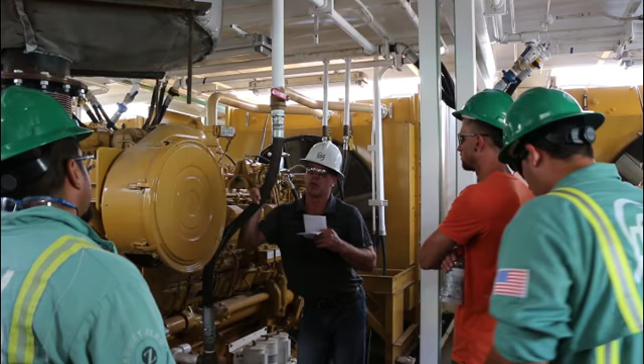So don't ever work on an engine fuel system with the engine running, because you really have no control on that. And that's what happened to the motorhand in that situation. You didn't cut off the engine? Well, I can't speak for him, but there were two engines running and one was shut off, and he decided to work on the fuel system with one still running instead of shutting it off and starting another one. But anyway, fuel systems, yes, they happen to burn right down very quickly.

These breakovers set up and change on the fly? Yeah, that's exactly what these are. You always have to have one on, right? But you can change those on the fly. I really don't recommend it. Yeah, in case something does happen.

I guess it's pretty normal. That's called slobbering, is what that is. And it's from running an engine at idle too long, at idle or little to no load. And there's no way to get around it other than putting a load onto the engine, 20, 30, 40% load. It'll happen when it's brand new, and it'll happen when it's got 50,000 hours. We expect our engines to last about 60,000 hours.

These engines will die once the voltage drops below 20. That's why they have their own separate ones. So if you have one set of batteries running three, you lose your batteries, now you're on downtime. They're all equipped with their own battery charger in that box. That's one of the things a motorhand should really check, the quality of his batteries, the connections. Make sure that there's no corrosion, and these are all maintenance-free batteries, so you don't have to add water or anything like that.

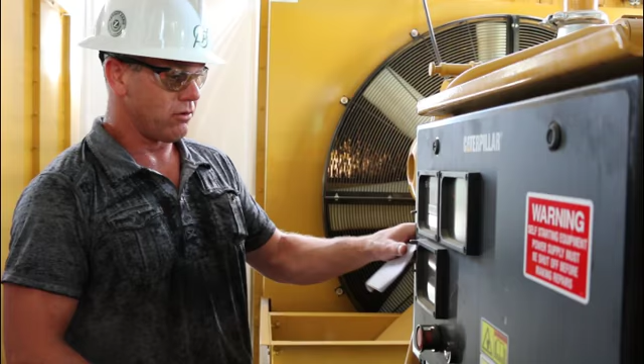We get many calls. My engine won't start, it won't do this, it'll shut down. It's got 95 hours on it, and obviously there's no... So I call it like pages of a book. So you can...

First page, and that'll tell you your load. Obviously, if it was running. Yeah, you can go through it and see it would be something other than, but you can't screw anything up, you can't mess anything up.

But that's how you get through your fault codes. Obviously, if you have a flashing light, there's something wrong, right? They don't flash just to make them look pretty. But you can play with it. There's 5 pages. So you can go through the load, you can go through each individual gauge. It'll tell you in metric, standard. You get your codes off of here.

So when you guys are out there, you can play with them, right? And just learn how to go through the codes, how to get the codes, and learn where your gauges and your pressure should be. Right, when this rig leaves the yard and goes to the field, I would assume that everything is in 100% working condition. So you know that the fuel pressure should be 68 pounds, you know the oil pressure should be 68 pounds, your voltage should be 25, whatever. So take the time to know what each individual gauge does, and know where it should be sitting, right?

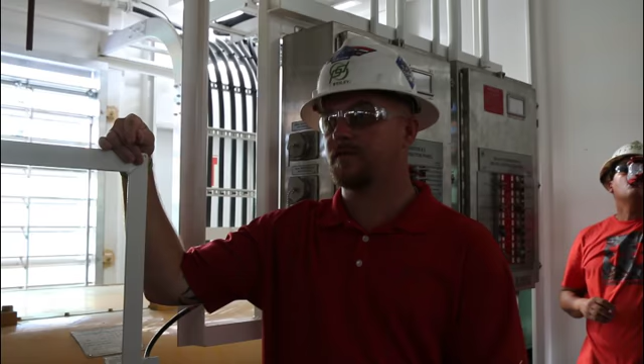Wes? You can check your turbo temperatures, your right side, your left side. That panel's basically a dummy panel. You can't hurt it. You can change it from US to metric, and then you may be like, oh, my temperature is way high. You just got to understand your Celsius, Fahrenheit. Understanding this engine, knowing the key points to it, we can show you guys a little bit more throughout the shop.

Then over here, you got your rig savers, you got all your fuel system, knowing where all your shutoff valves are, just in case you got a fuel leak, something like that. Understanding your equipment, like it says, if you understand it, you'll maintain it, you'll follow it. Checking your levels, your grease points, stuff like that, that's gonna keep the engine life long term for this rig. These engines go down, this rig doesn't run.

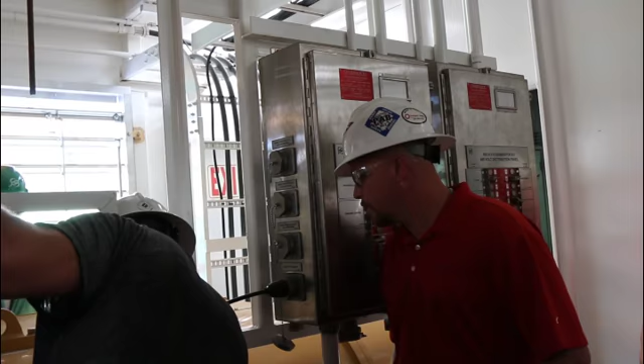One of the things I'll bring up right now, these generators are equipped with, they're called double bearing generators. There's one bearing in the front, one bearing in the rear. And it says right on this tag how much grease and when to grease them. I advise you to pay attention to that. That's another huge problem we have, bearing failures on these generators, and we bring them back and you ask the push, have you been doing your maintenance stuff? Yeah. But when we get the generator back and tear it down, we can see that nobody's greased this generator in months or years or whatever, right?

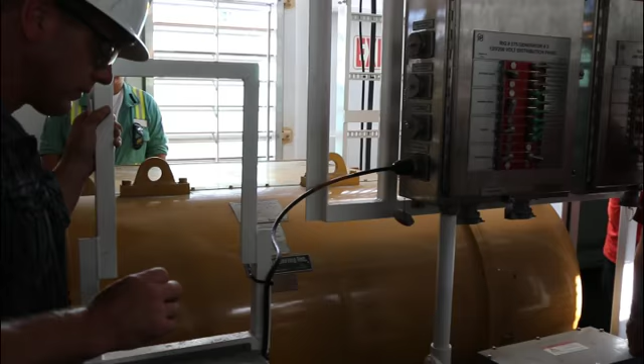So there's a grease line right up here, and there's a grease zerk right there in the back. I think it's 6 ounces every 12 months. I believe a tube of grease is 14 ounces. So those bearings take, give or take, a half a tube of grease every 12 months. You don't have to do it all at once, you can do it quarterly or whatever, right? Can't hurt them. These things have got grease strips.

The grease drops on the bottom. So I mean, you can put a couple hundred tubes in, but you'll just have a couple hundred tubes on the ground, right? But at least we put grease in it. Yeah, that's costly.

Depending on how bad the bearing is, if the rotor, everybody know what a rotor and stator is? Rotor is obviously a rotating part, stator is a stationary part. If they touch, it'll be about a $40,000 repair. This whole engine package is $400,000. So it's not a little 350 Chevy, right? You build a really good 350 for what, a couple $1,000? So without them, it's the heart of the whole rig. Without it, you got nothing. Every piece of the rig is important, but obviously, because I take care of engines, it's the most important.

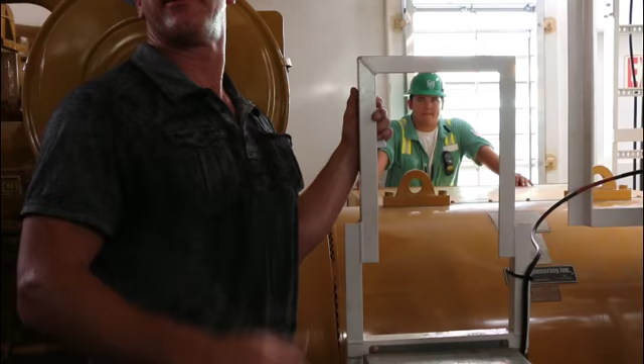If you run an air winch in Canada, it freezes up. So we don't run a lot of air on our rigs. We don't have huge air compressors like some of you guys might be familiar with, two big 60 horsepower air compressors. Ours aren't. Everything is hydraulics due to the fact that hydraulic doesn't freeze. So it's kind of a Canadian mentality more than anything.

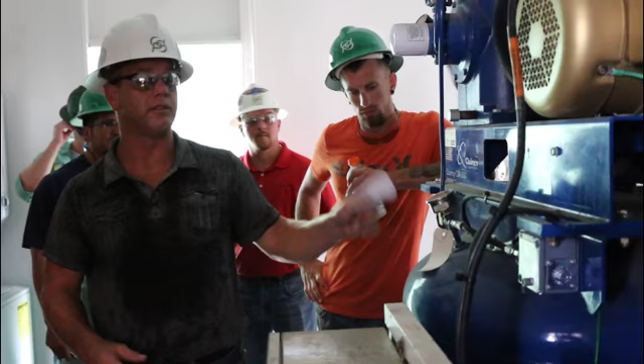So we'll go through there. But it's set here, just like everything set at factory. We set it. This is about 118 pounds right now, and they'll be set identical. They do require oil changes. That's why they have oil filters. They don't take a lot of oil, so it's not costly. And obviously redundancy. We got two of them, so you can leave one running and change the oil in the other one.

Obviously, you guys have motor hands. You should have some kind of a maintenance book. Your push should. That's part of it. What are these compressors going to be feeding on the rig? Well, they don't feed a hell of a lot other than a few clutches and that. And then obviously air for start up, but we don't have really any winches and that. So that's why they're not very large.

Anyway. What else you guys want to talk about? What's this space here? This is a work area.

250 to 500 hours, they give you that leeway to change the oil. The big ones are 1,000. Caterpillar recommends every 500 hours, but we did a pilot a little while ago, so we kept sampling our oil to figure out where a safe hour range would be. And at 1,000 hours, the oil still has its properties and capabilities. There's some drilling companies offshore that don't change oil. They just change filters and replenish.

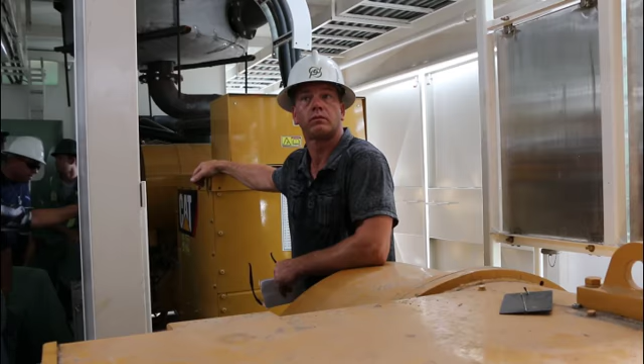Obviously, if there's nothing in the sight glass, put something in there. They stay pretty close to the bottom. The level on them is toward the bottom because there's an expansion there. So if you guys fill them up every day, all the way to the top, you're gonna burp them out. And then you're gonna think that you're burning 5 gallons a day. It's actually your expansion for when your coolant gets hotter.

Quiet, perfect. Each company has their own idea of what radiator is good and what radiator is bad. This is a Fuzzy's radiator. They've been around for years and years. They build a good product. We stick with Global Heat Transfer, because of the cold. It's a copper core and it's a tube. The ones we use are tube type. They seem to hold up better. And you stick with one thing and you standardize. Because if you have so many, now you gotta have spare parts for this, spare parts for that.

So, engine packages, we work on them all. 3512, 398. If it burns diesel, we work on it. Even if it don't. If you see something wrong, bolts loose, something like that, let somebody know. Can we shut it down? Do we need a mechanic? Do we need an electrician? Whoever it is. Because if you just cover your eye and keep on walking, eventually it's going to come apart. It's going to wreck something. It's going to put a fan through the radiator, stuff like that.

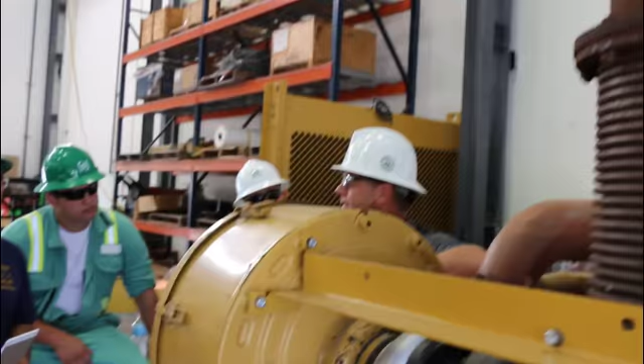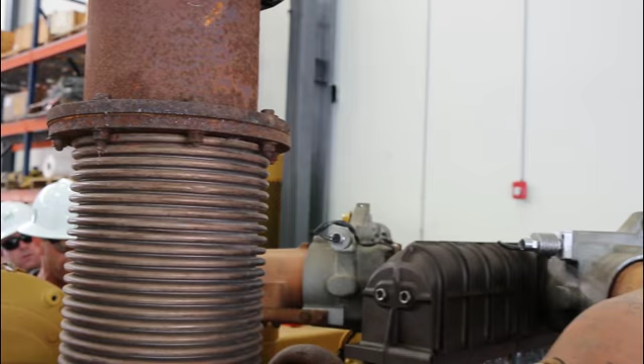The engineers could have done it slightly different. It's called a micro switch, and it's got a little ball in there, and it runs a circuit from here to that one, back over to the other side to the same micro switch. And what happens is from the vibration, and there is a bit of soot that goes through here, the carbon gums these up, and then it'll just shut your rig down.

Because actually, this circuit gets cut, right? It's not a circuit anymore. What it does is it grounds the ECM, so it just kills all power to the injectors. So no matter what you do, it won't crank, it won't do anything.

There are many of them out there, and that's one of the reasons a lot of the contractors use them. There's Cat dealers, they're everywhere, right? They're in San Antonio, they're in Odessa. Every engine's a good engine, but they're gonna break down. So the difference is being able to get parts, right? Get mechanics. And that's one of the reasons why we use Caterpillar. I can phone Joe's engine shop and tell him I got a 3512. He knows, or he's got a mechanic that can work on it.

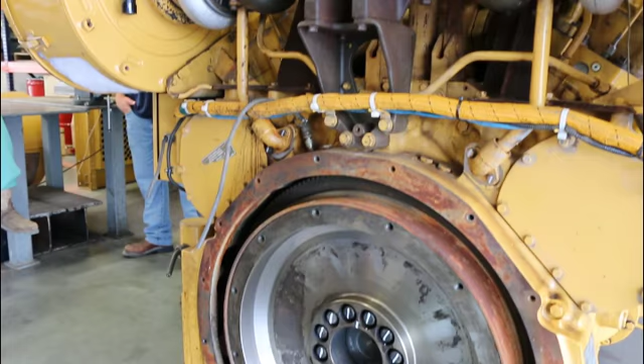Anybody? Nothing? Frank?

These sock filters are cheap. It's easy to pop that cover off and pull that thing out and just change that sock filter, not the whole filter. Monthly, semi? When you see them dirty, due to the fact that in West Texas, some days are dirtier. If you go up north, you may not have near the dust that we do in West Texas. But yeah, those are $2.88, I think. They're very cheap compared to that filter, and you can take it out, throw it in the trash, slide another one on there, put the air cleaner back in, and you're back to business.

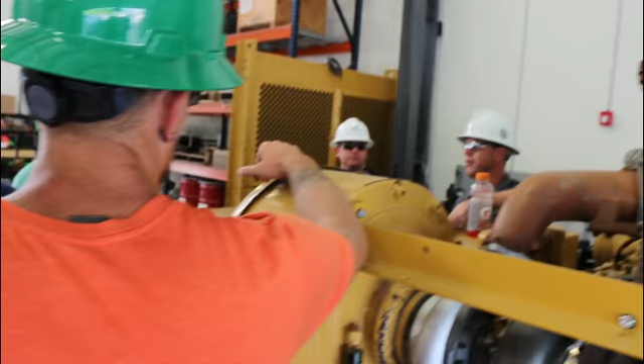So, coming from the farm, years ago I watched my dad take the filter off the tractor, bang the dust out, blow the dust off, and put it back in the tractor. That is not a practice at Precision Drilling. We don't mechanically clean filters. You can actually take your filters in and get them cleaned.

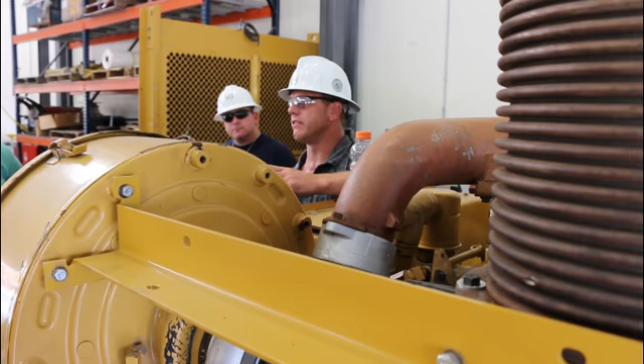So now, obviously, they're engineered, right? Everything is engineered. As the filter gets dirtier, it becomes more efficient, really. Less and less air goes through it, it cleans better, but you gotta feed this thing air. This thing takes a shit pile of air. So if you see it dirty, just swap it out. Make sure your rig manager knows when you only have 2 filters left.

Realistically, you should have a complete set of filters on your rig at all times, right? And the people that bring the oil can bring you filters. We have PD Supply, which supplies rope, soap, and dope. I call it rope, soap, and dope to our rigs, and the rig manager should have any or all your maintenance products on hand.

The functions of some of the safety equipment, like the catwalk: they don't have laser sensors on there like before. This has a safety curtain around there, so with people walking into there, you actually have to manually bump it, engage that, or it will isolate that equipment, lock it out. Up on the rig floor, we'll go through fire extinguisher replacements, eye wash areas, lockout boards. I'll let Jason Atkins go through the Amphion system. He's electrical foreman for the shop and field manager. I'm sorry, he's a manager.

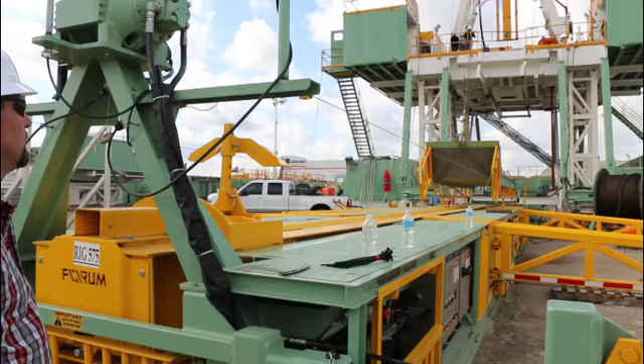If for some reason somebody were to step up here, they have to manually bump that cable. If you're going to be going up here to adjust any equipment, that's either being told to go down there or you're going down there on your own. If you're going to be going up there, of course you would alert the operator, hey, I'm going to be on the catwalk. But also there's this other device, it's an e-stop for that equipment. You go up there, give it a pull, it should automatically shut off this equipment and it will not function until you reset it manually down here.

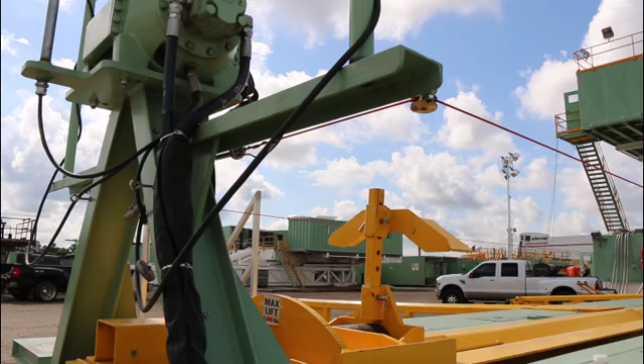So this cable works just like a garage door opener. If I tug on this cable, it's going to pull out that e-stop and it's going to disengage it. The only way to manually engage it again is to come back in here and reset that. That's one safety feature on the catwalk. The older rigs had eyes on it, kind of like, right, just like the garage. And what's happening? The location wasn't level. They were off, out of sight, and giving them a lot of alarms. So they kind of went with this safety feature.

There's going to be a camera installed on the center of this as well that hasn't been installed yet. So you have the ability to see casing getting run, the hands up on the racking board. You can see what's going on as a driller inside that console, because once you're inside there behind that drilling console, your limit of visibility without those cameras is narrowed to just what you have on that screen. Once you get pipe in that derrick, you're not going to be able to see half that floor. You have to utilize the cameras that have been installed that you can zoom in, pan out, and actually see what's going on operation-wise.

That communication, that's the key that we talk about all the time. Communication is key. You have to be able to talk with your hands, talk with operations, what's going on, and have good communication with your hands. If something's going on, you've got to be able to have that stop work authority. You know, the driller can't see everything that's going on. He can't see where your foot's getting put. He's not going to know when it happens. You've got to alert them. You've got to make sure you're talking about it. Having good guys on the floor who know how to run that floor and operate all that equipment. Whoever's going to be on that floor, they're running that floor. That driller's just making sure that they're doing what they're told and working safe.

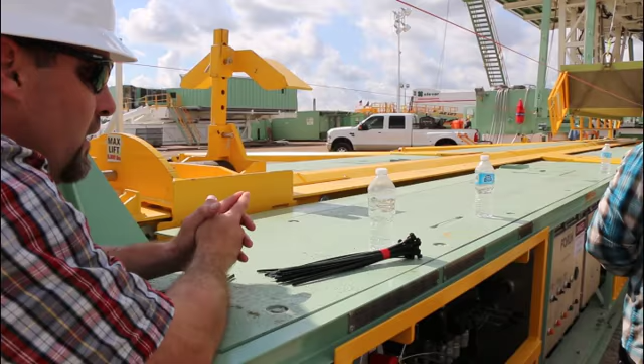So the communications between that and this usually cause a lot of problems, electrical problems mainly. This thing is pretty much, if it breaks, you're going to need an electrician or you're going to need a hydraulic tech. There's not going to be a lot you can do. If something gets bent, you can try to straighten it out, but it's mostly electrical and hydraulic problems.

I know the biggest issues we had on these lots at the time was the hydraulics getting hot running it. Yeah, tanks might be a little too small. In the middle of the day when you're running it, the hottest part of the day, you're running pipe up and down and the hydraulics are getting hot.

I need to look into the hydraulics on this one here. I'm not sure on these automatic fans on these. I know the older ones you had a manual fan on them, and you also had manual heaters on it. We also had a time for a while there where guys were leaving the heater on during the winter and forgot to turn it off. So it was keeping the hydraulic fluid warm, and with the hot temperatures running the catwalk up and down, it's overheating, and this whole thing goes to crap suddenly.

It's made in such a way that we can manually roll the pipe on, lock it up, and still go back to picking up pipe the old school way with lift caps. Well, it depends on what your problem is. If you're having a hydraulics issue, none of this is going to work, your slide's not going to work.

So you can run this from the floor and down here manually. And I know we have problems with a lot of the first generation rigs where there wasn't communication, they had to have a guy down here.

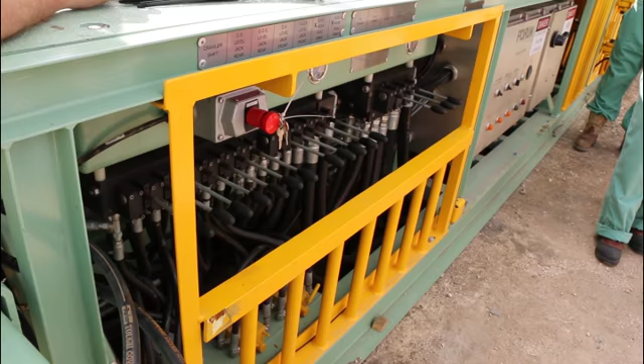Where's the control for the floor doghouse? The control's right there in the corner, inside where your track is. You slide that pipe in there and it holds it in there, so that way it doesn't back on.

But we're not supposed to work anything overhead here. So if it does get stuck up there, we'll get somebody out here to bring it down. Usually, if something got stuck up in there, we'd have you put the pin in there just to keep it from falling, but then we'd send one of our guys out to lower it down for you.

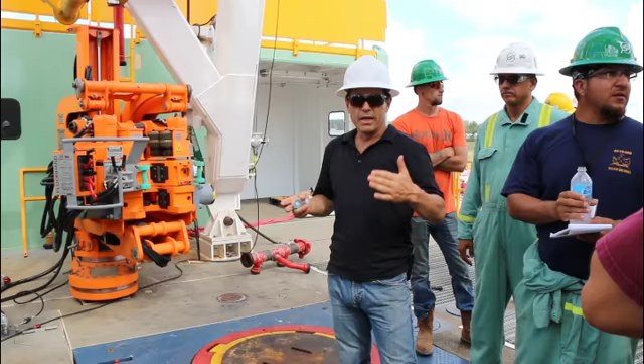Right over the A-leg spread, so you got more floor space. You drop the rotary table down so it's flush with the floor now. That's almost it. We took the 3 good features that NOV had and we incorporated. Setback has been increased, more racking capacity, 25,000 feet now. Hook load of 850, I think it is, right? 850.

What are some of our main safety features on the rig floor now? Would you say? Also, we do have a mouse hole slip bowl so that you can do stands offline as long as you're taking the precautionary notes. Safety feature, dropping of the rotary table was a safety feature. We've rotated the drawworks so that the drum is visible from the driller's console.

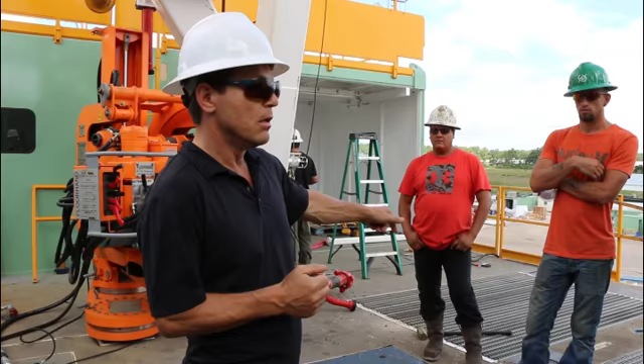The iron roughneck's been repositioned slightly, I'd say it's as safe as it was before. There's nothing really changed there. Yeah, the wrench will reach both mouse holes. These rigs are originally designed with 2 mouse holes. Because we run range 3 pipe, which are 45 feet long, you can put 2 joints in, screw into the first one, pull it out, screw into the second one, and then build a stand on the fly as opposed to building it offline and then grabbing it.

Another standard across all of our rigs now is anti-skid on all of our rig floor walking areas. Like you said, they dropped the rotary table to be level with the floor, so it's not a trip hazard. We're still going to be installing rotary mats with skid material on them with the danger zone painted on there. Just like when you walked into this area, on each A-leg there's a stop sign saying beware of the danger zone, just like in front of the drawworks.

Those signs are there as a warning, as an acknowledgement saying stop. Look at what you're about to walk into, look up, look above. There's operations going on, your third party coming up here, that stop sign hopefully will stop you and alert you that there's operations going on here. If I'm not aware, I should look around and ask these questions. Just like on the driller's console in there, it says authorized personnel only. If I'm not authorized, I'm not going to touch it.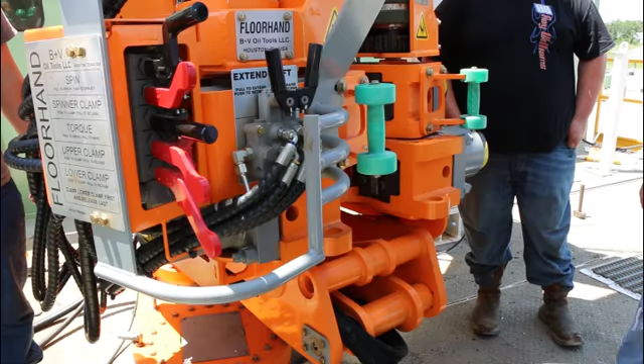Most of this equipment out here, if you're not trained to operate this equipment, ask, get trained on it. If you never run a Floorhand, an SC80, get to know that equipment, know the functions of it, know how to maintain it, and do inspections on it. The equipment's only as safe as the operator itself.

If you don't set your parameters right on this drawworks, you don't do your block calibration, you can still tear things up. It does have safety features in there for your lower and upper limits, but if for some reason you didn't run the proper strings on your block, you added new elevators in, new bails, you can still run into the floor. If you don't write the proper number of strings on your block, it's going to run a lot faster. It's not going to know its height correctly.

These are all different things that are incorporated with it. They've added into the system. But just like anything else, there's that human error. The system's only as good as the person operating it.

There's two other features we've added with the block system now as well. Monkey board collision. So there's set points that you choose in the derrick. There's actually two systems. One's mounted right on the main leg at about 67 feet. So if the elevators are extended out at that point and you pass through that, you're going to get an audible alarm in the doghouse just as a reminder.

It doesn't stop it, but we're also adding that feature right into the Amphion system, so it'll act just like you have your lower limit and your upper limit. If your elevators are extended out either above or below the board, it'll slow you down, or it'll actually stop you, and the only way you can carry on is hold the override button with your elevators extended, right? So, yeah, after a certain point.

So you can push it out, close to the end of the diving board to assist the derrick. That's right. No, it will. Right, because when you push the pipe out to assist the derrick hand, as soon as he has it, you hit float and away you come down, right? As soon as you're in float mode, it'll allow you to go up and down because the elevators are back on well center, right?

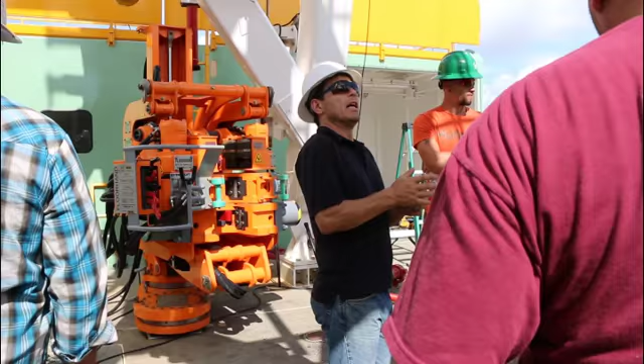Yeah, she's in there testing. It's already installed - not the second section up. You see a frame around it? Look up this derrick leg right here, you'll see a clamp on there.

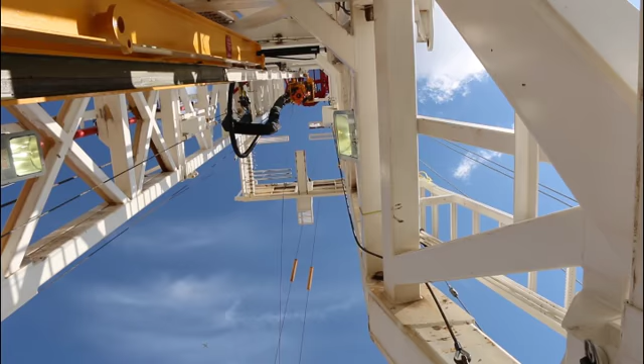They put an alarm and a buzzer and stuff in there. This is a new system we're going to try - this is the first rig it's going on. That's actually a second system, like the Amphion NOV system, that's a secondary. We're just testing them out to see. Because the thing about that is it's a fixed set point - it doesn't rely on where you position or do your limits. That one's a fixed system that's going to flag you so you know you're there.

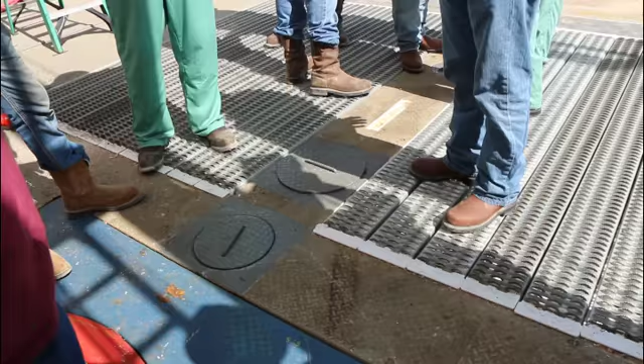There's a third mouse hole here, guys. What that's for is our test stump. We have what we call our stack rabbit BOP handling system - there's actually a test stump on it so you can test offline. You can stand the stack up back there, and that's a place where you can drop a joint of pipe through it and test offline, so you can pre-test all your BOPs.

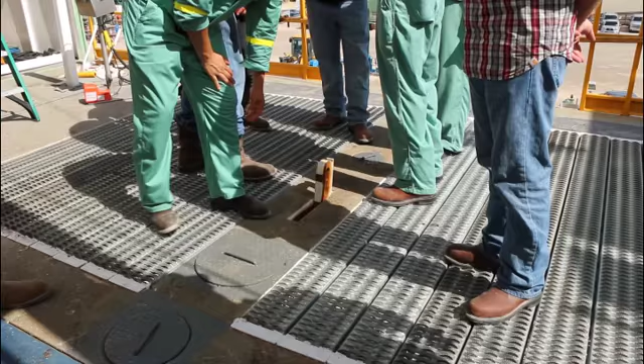The lug in the center flips up - you just want to pull that up on the front. What that is, we call it a logging lug. So when you're logging, you've got your sheave here. That's just a place to tie it off, right? It's a certified tie-off point for it. I mean, you can use it for a lot of other things too, but that was its main purpose. It lays down flat into the floor so it's not a tripping hazard.

Features that we've had on the floor, we're still installing - waiting on equipment, as you can see we still have a lot of construction going on. We're getting things buttoned up. We will have a shower eye wash station available on the rig floor in case there's an emergency where you need to rinse off or wash off your eyes for some reason. There'll be a shower and eye wash station in that area.

So everything that we install is easy to rig up and rig down. That way, equipment gets put up and maintained like it's supposed to. Each one of the buildings is going to have a fire extinguisher, depending on the kind of building, what kind of fire extinguisher is associated with it. The drive house, electrical house, is going to have CO2 fire extinguishers to fight that type of typical fire.

Inside this building for the dog house, it's going to have two different kinds of fire extinguishers - one ABC and one CO2. That way if there's a fire on the floor, you have an ABC available, but there'll also be at the entry points to the rig floor, fire extinguishers available.

Like I said, other safety features - anti-skid on the entire floor, walking surfaces, rooftops have anti-skid, handrails all the way around, and safety cables on the roof. So whenever you do start rigging down handrails, there is a safety tie-off area, so you can maintain 100% tie-off at all times.

Rig floor, they do have a rope grab system, and you do have SALA blocks coming in that you'll be installing underneath that monkey board. They're not installed yet, but we do have a rope grab system, so you can use it whenever you're working at height.

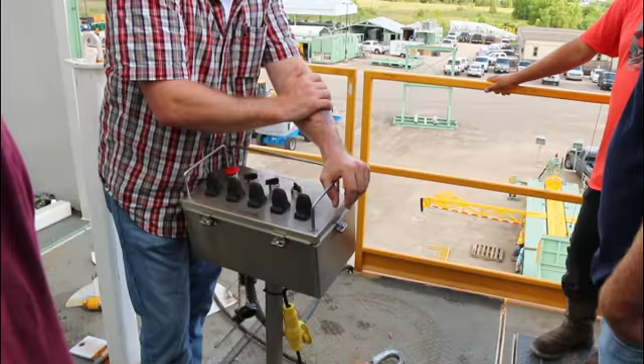Most of the time with the communication, if you knock this over and you mess something up, usually you blow fuses or trip breakers down there in your panel. And so once that happens, you're not going to be able to control it from down there either. You're going to have to get a hold of one of our guys out in the field. The best thing you can do is just be real careful with this. Most of the time I've seen them drag it over the handrails and tie it up with a rope so you can't knock it over. Or get it wet.

These seals, after about a year, this rubber gasket that's in here, I don't know what they're using, but that seal usually gets all messed up. So water will eventually get in the bottle. Just keep in mind that's what this is. So making sure that this is maintained and works correctly. You don't just pull on this, you have to actually twist it to release your E-stop.

You got to have your foot maintained on the pedal at all times, be able to function and work the equipment. I know it has enough cable here, but you don't want to have this in a blind spot where you can't actually see visually down to the catwalk. We don't have this on the other side. It can be removed and moved around the cable. I don't know what the length of it is, but I'm sure you can position it in an area where it's more comfortable for you.

Most of the time, you're going to have all the pipe on this side, and you're going to be able to feel it coming up. So it is movable. It's not fastened to the floor. You can move it around. It's not a wireless unit. I know some of the catwalks have wireless controls, but a lot of that's not getting maintained. They're dropped, they're left out in the rain. They get damaged. People lose the keys for them, and guess what? You have to work them manually down there.

This isn't going anywhere. This is a lot better. Very easy. Labeled exactly for the function it's doing. It's got a good safety feature. This is where all the magic happens right here. A lot of people don't realize this. Whoever's sitting in this chair has everybody's life out there on the rig floor in their hands. They can control anything and everything that happens, and so whoever's here needs to be paying attention at all times.

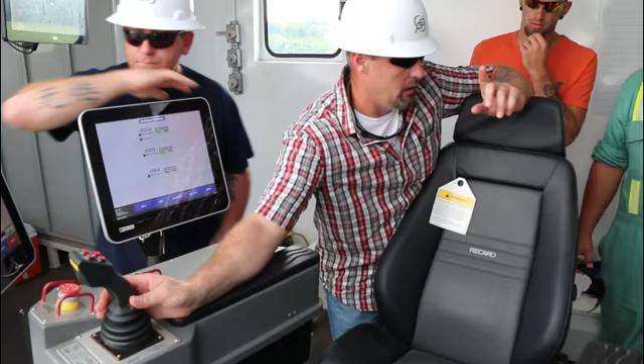Every time you got to do a rig move and you go to rig up, I don't know what Precision's policy is. I test this thing every day just to make sure it works. But you've got so many people out here depending on you, I would test this and make sure that it works no matter what.

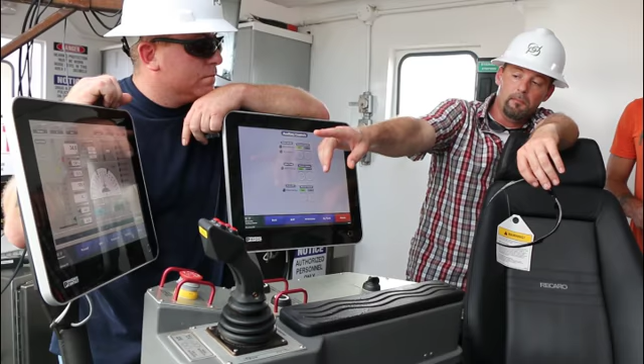We have a lot of alarms going on. Half the stuff here ain't working, so everything I try to show you in here is going to be messed up. But this is your drilling page, and it shows pretty much everything that you got going on, where your block height is. This is to make sure everything's calibrated, your high and high, your low and low stop.

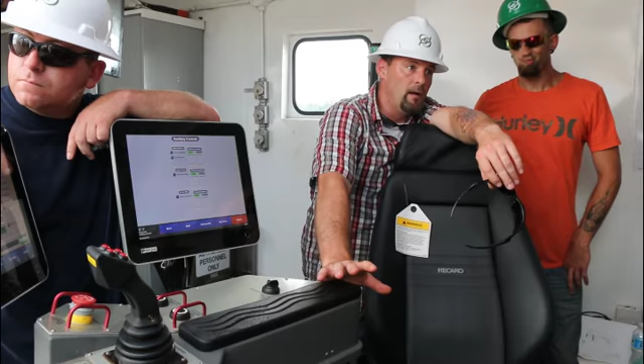But like I said, anytime you have problems with any of this, it's better to call us and let our guys go out and fix it until after you guys have all had some experience on the rig. You flip a switch and you're not sure where the switch is, and you turn it on and your blocks fall. That's bad. So as for right now, until we get some more training involved and get you guys more familiar with the rig, we're just going to leave it, call the pros.

There's three parts to this system right here. There's the VFD house, which is downstairs. That stands for variable frequency drive. SCR rigs are silicon controlled rectifiers. Pretty much the only difference is DC and AC. But this system here comes in three components. It has your dog house, your VFD house downstairs, and an LER house, which stands for local electrical room. You have some breakers and stuff out there. We're going to go out there in a minute.

These panels up here pretty much are just for your lighting and stuff like that. You don't have a whole lot in this one that you guys need to mess with. Your camera systems and these monitors, those switches right there for your windshield wipers and your fans, and then your lighting circuit. That's really all that's in here. So everything else that controls this is over there in the LER house, which we'll get to in a minute. So e-stops on the chair itself, which e-stops do those control?

Well, there's different e-stops. This right here shuts down the Amphion. It doesn't control your generators. It just stops Amphion. Another e-stop we have in this building will shut down everything on the rig. That's the generator. This will shut down the heart of the rig. If there's something out of your control, this is last resort, nothing working, your engine killed. This will shut down all power to the rig. Emergency lighting will come on, and your Amphion screen will stay on.